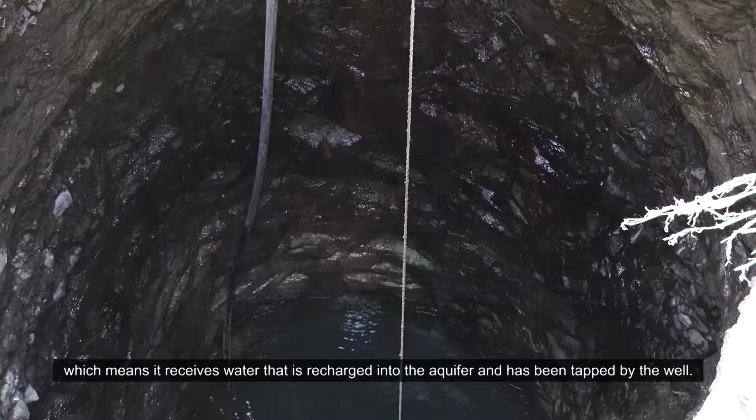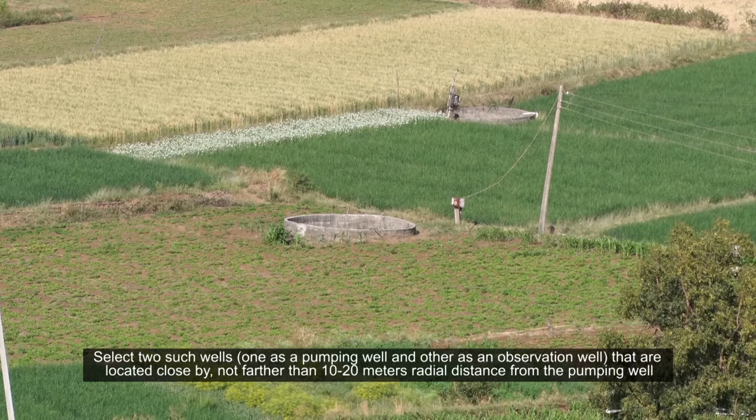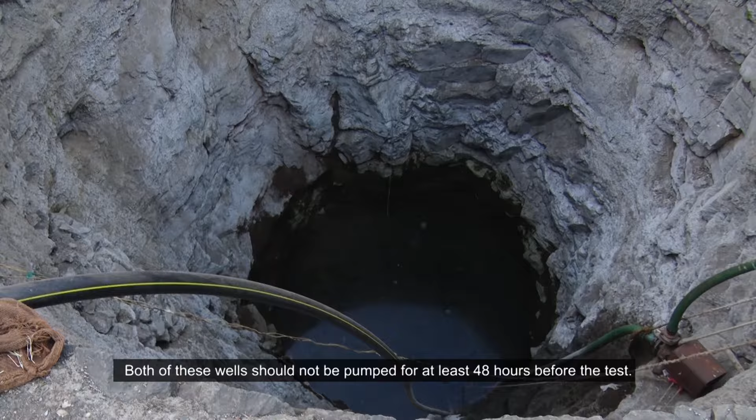To conduct a pumping test, select only those dug wells that have their own water, meaning they receive water recharged into the aquifer and tapped by the dug well. Select two such nearby dug wells, one as a pumping well and the other as an observation well, 10 to 20 meters apart. Ensure these wells are not pumped for at least 48 hours before the test, and both should have similar depths.

Measure latitude, longitude, and elevation of both dug wells using a GPS device. If a GPS device is not available, download the NoteCam application from the Play Store and measure the location details using this or any such app.

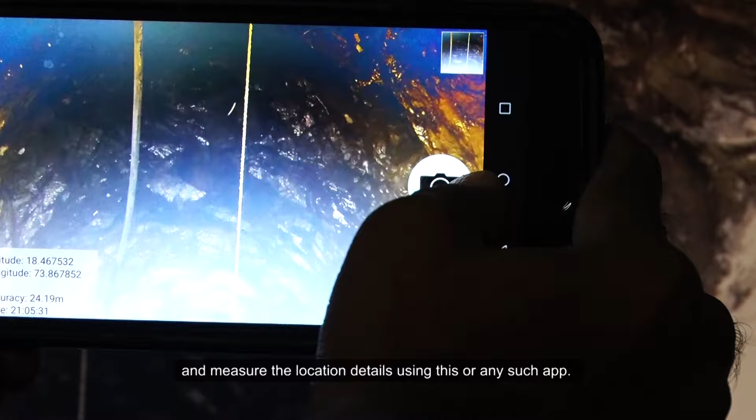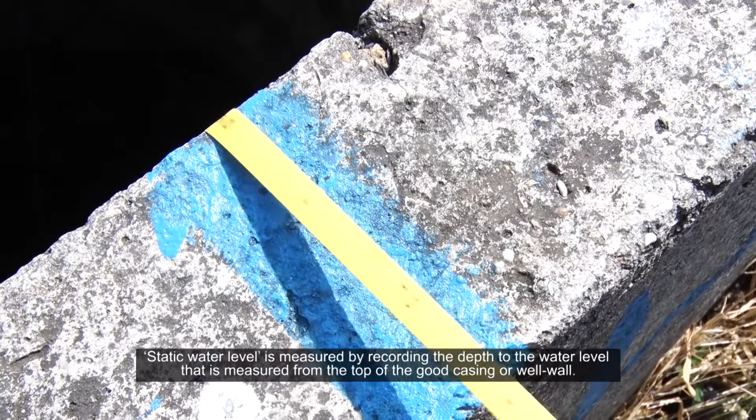Now measure the water levels of both dug wells using a meter tape. This is called the static water level, measured by recording the depth from the top of the dug well wall up to the water level in the well. Do not measure the volume of water present in the dug well.

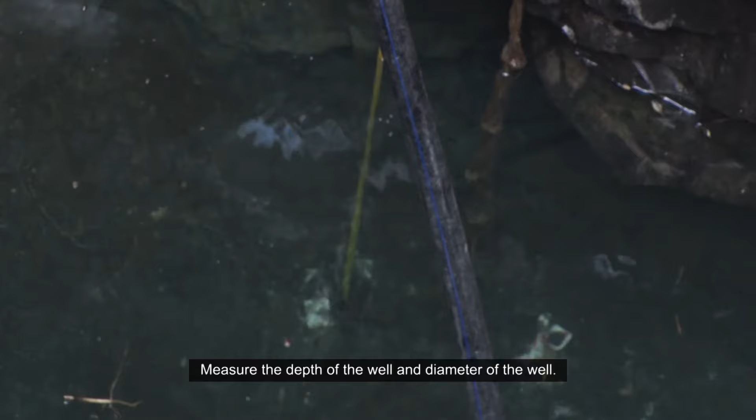Measure the depth as well as the diameter of these dug wells. Always measure the diameter from the center of the dug well. All these measurements should be noted down in meters.

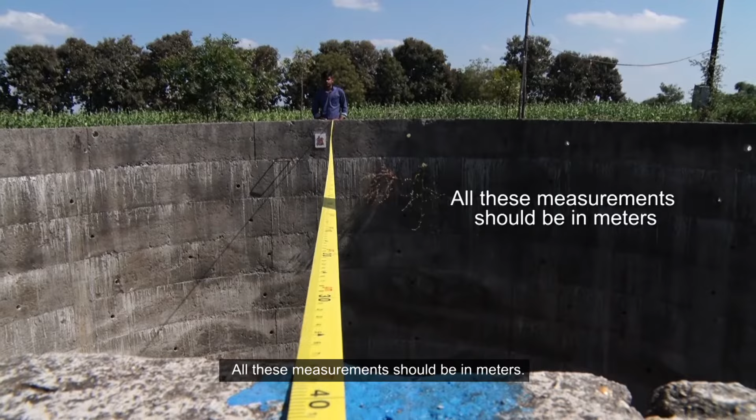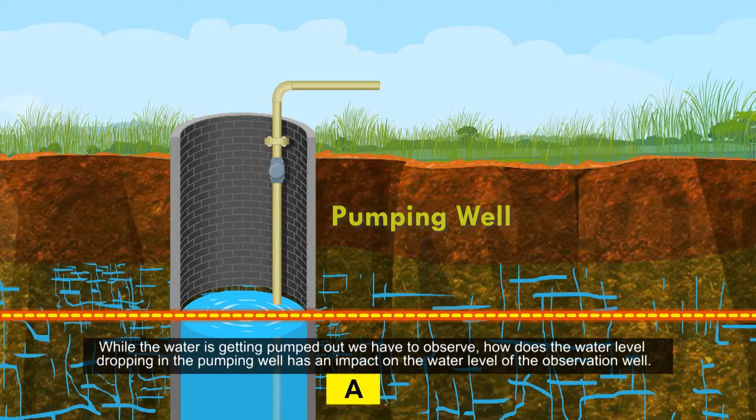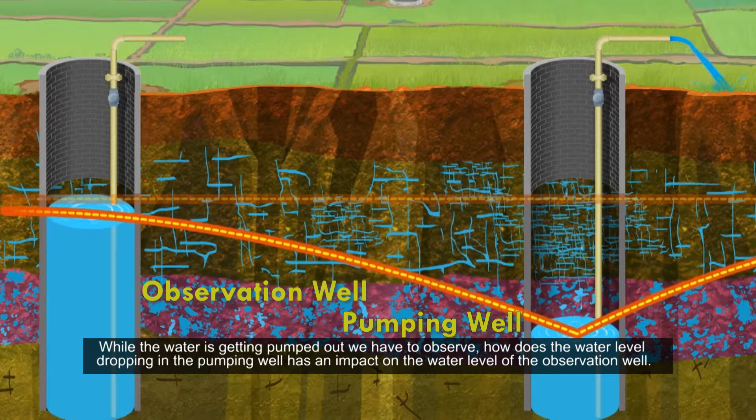We have to conduct the pumping test on one of the two wells, the pumping well. While the water is getting pumped out, we observe how the dropping water level in the pumping well impacts the water level of the observation well. To do this, measure the water level in both wells at every 5-minute interval.

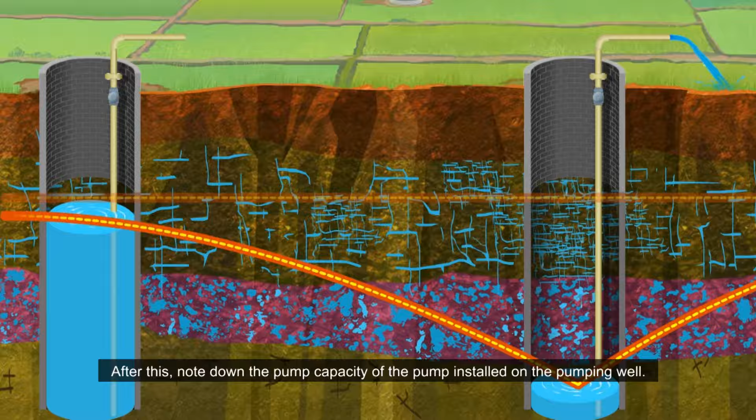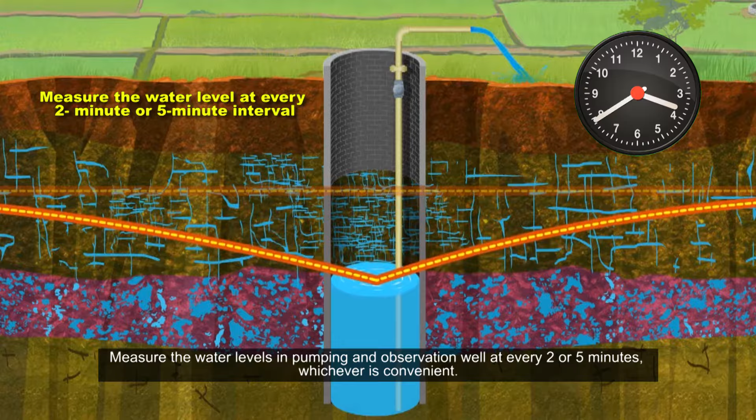Note down the pump capacity of the pump installed on the pumping well. Select a convenient time and start the pumping test. Measure the water levels in the pumping well and observation well at every 2 or 5 minutes as per convenience. The pumping well should be pumped for at least 3 to 6 hours.

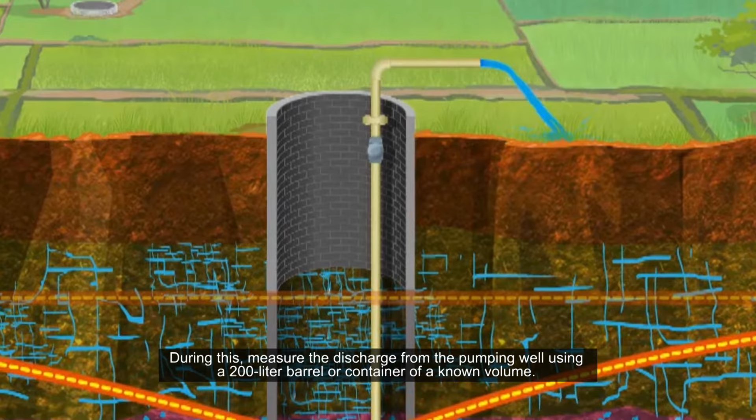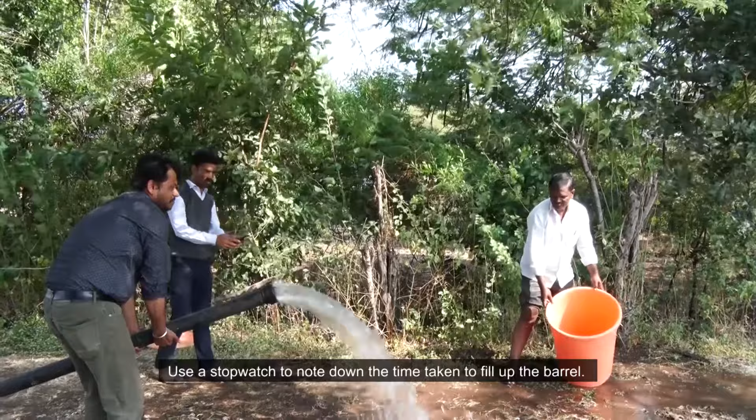During this, measure the discharge from the pumping well using a 200-liter barrel or a container of known volume. Use a stopwatch to note down the time taken to fill the barrel. Measure the discharge 3 times during pumping: at the start, at the middle, and towards the end of pumping.

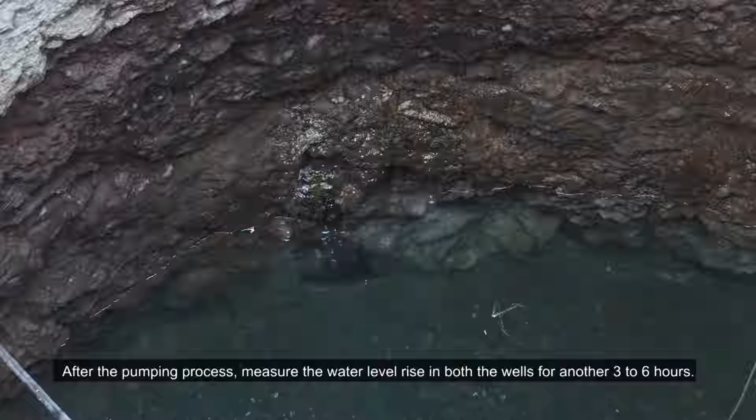Once the last discharge reading is taken, stop the pumping and measure the water level at this time. After the pumping process, measure the water level rise in both wells for another 3 to 6 hours, taking measurements at every 5 or 10 minute interval. Note down all the readings in a diary.

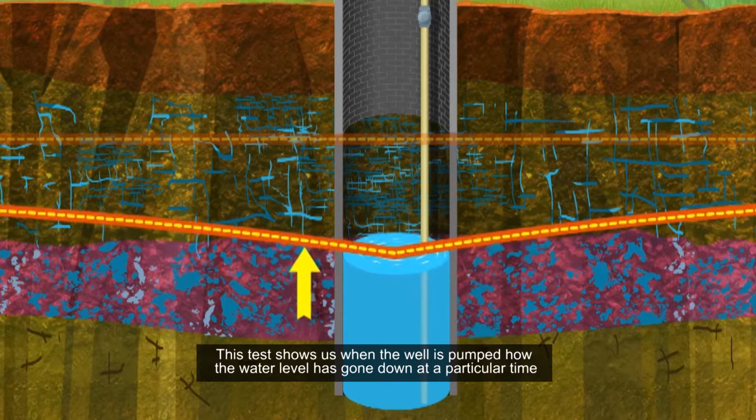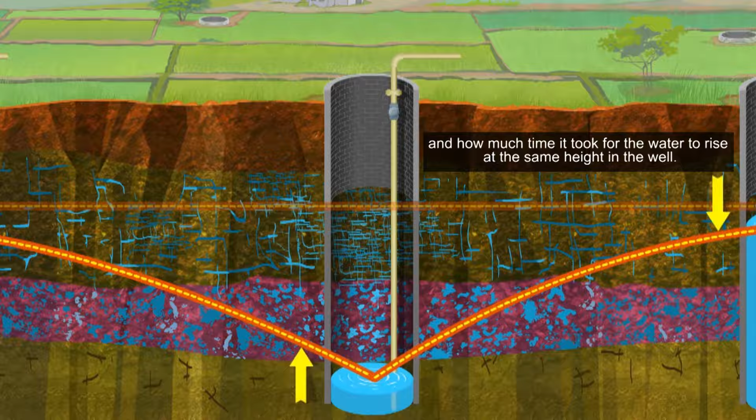The pumping test shows us how the water level goes down in a particular time when the well is pumped, and how much time it takes for the water to rise back to the same height in the well.

Now let us see what happens in the aquifer when a well is pumped. Along with this, we will also see what happens in other wells when one well from the same aquifer is pumped.

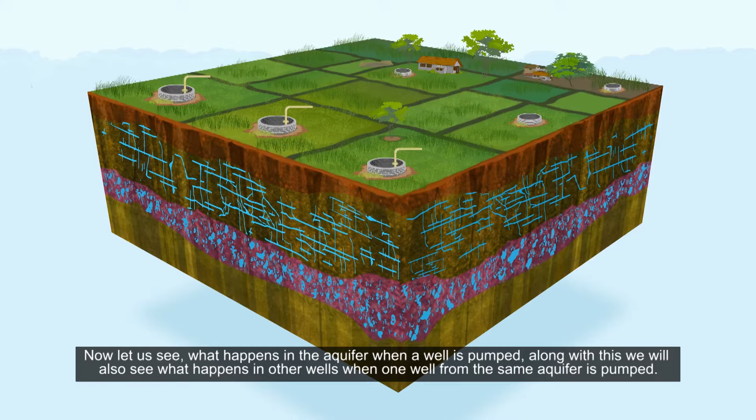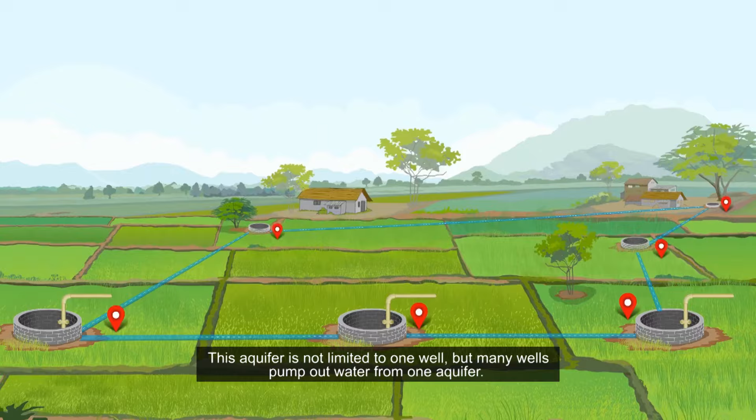The layer of weathered and jointed basalt along with vesicular amygdaloidal basalt forms one aquifer. This aquifer is not limited to only one well; many wells pump out water from one aquifer.

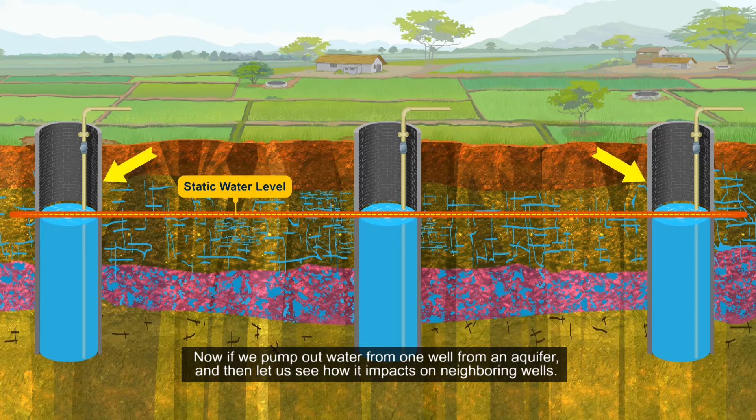Now, if we pump out water from one dug well in an aquifer, let us see how it impacts the neighboring dug wells. Let us name these dug wells A, B, and C. Now the owner of dug well A has started the pump.

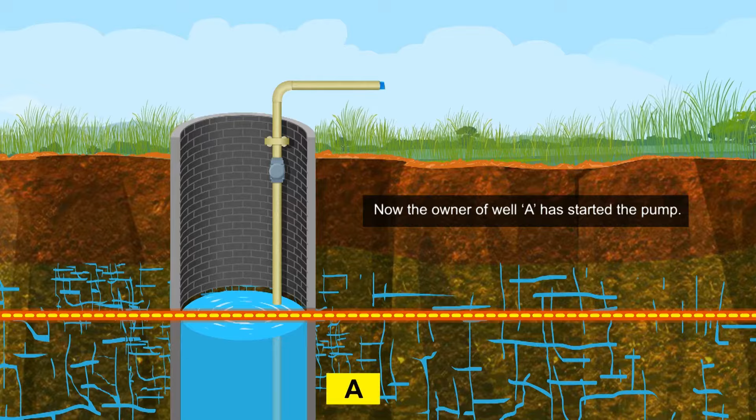As the water level in this dug well starts declining, slowly the aquifer starts releasing water into the dug well. We call this the inflow of groundwater into the dug well.

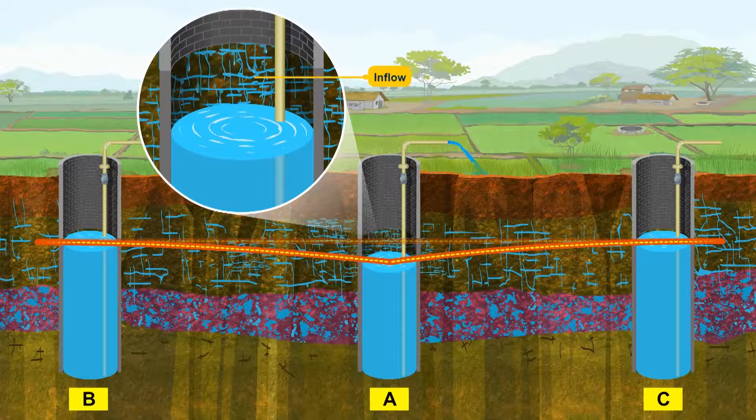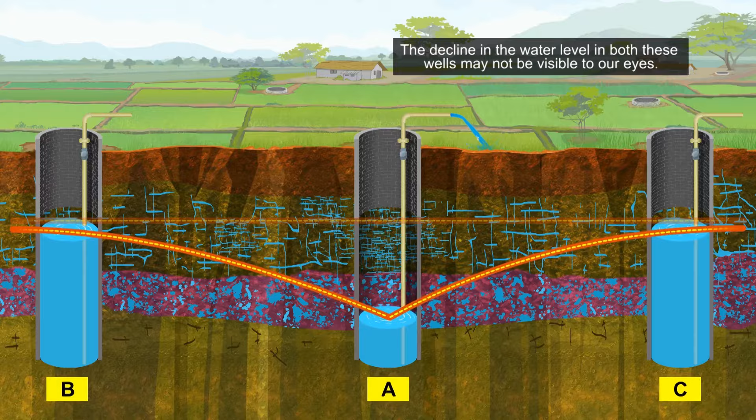During the process of water level decline in dug well A, after some time we observe that water levels have slightly declined in adjacent wells B and C. This decline may not be visible to our eyes. Why does it happen? Because wells A, B and C tap the same aquifer.

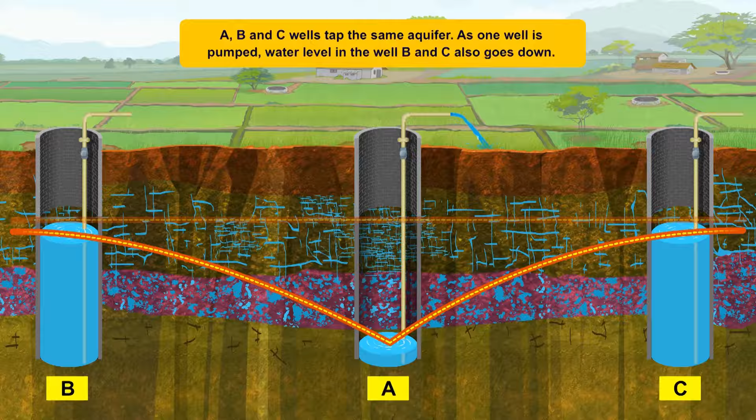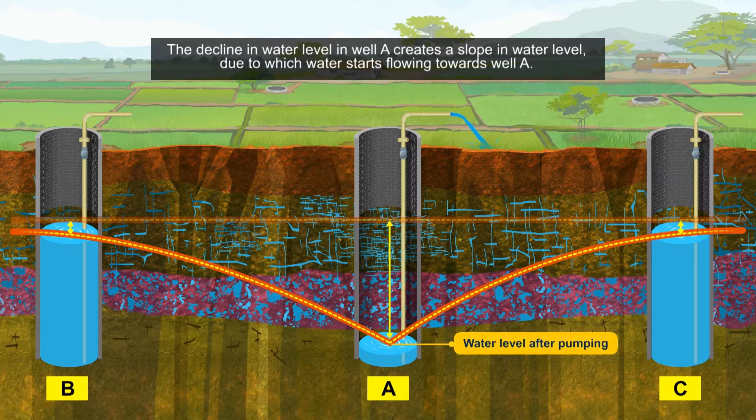When one well is pumped, the water level in dug wells B and C also goes down. The decline of the water level in dug well A creates a slope in the water level, due to which water starts flowing towards dug well A.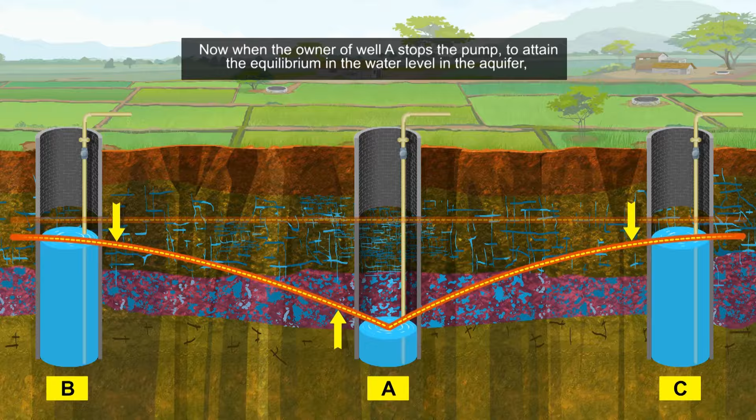When the owner of dug well A stops the pump to attain equilibrium in the water level of the aquifer, water level declines in the neighboring wells. A dug well which pumps out a large volume of water is actually pulling water from more than one well.

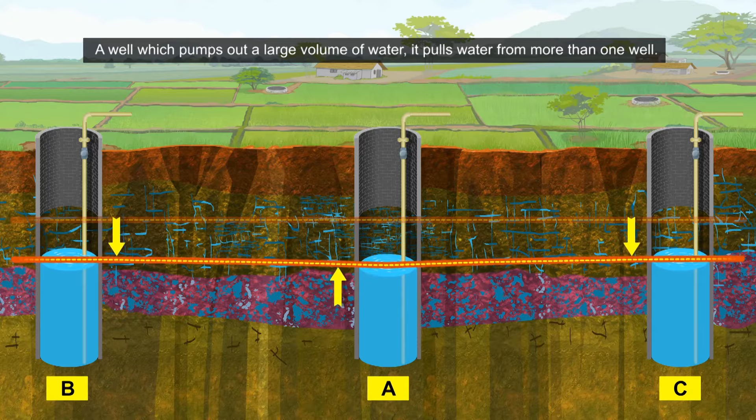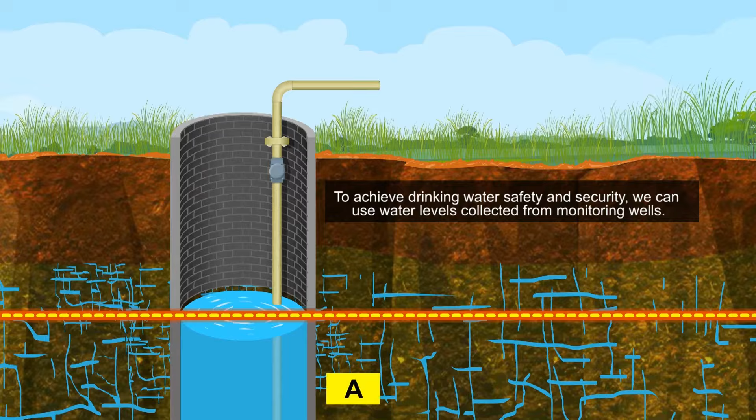By conducting this pumping test, we can estimate the transmissivity and storativity of the aquifer. To achieve drinking water safety and security, we can use water levels collected from the monitoring wells.